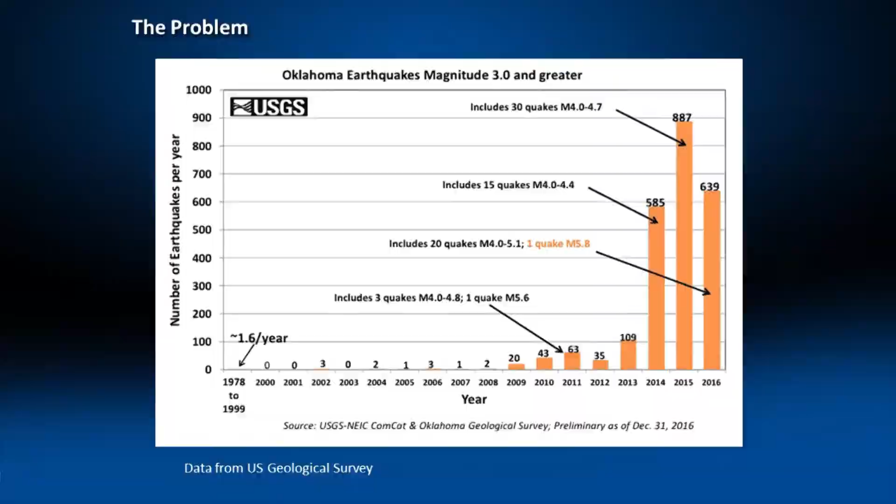You may or may not be aware, but some media outlets have actually called Oklahoma the new earthquake capital of the world, just because of the large number of earthquakes we've seen in recent times. In this graph, the three bars on the right represent 2014, 2015, and 2016. Everything else to the left dates back to 1978, and there were years we only had one or two 3.0 or greater events in the state of Oklahoma per year.

We had as many as almost 900 in 2015 alone, and I think 40 plus that were greater than a 4.0 magnitude. Over the last 6 years, we've had two that actually surpassed a 5.0 magnitude, being a 5.6 and a 5.8 that we'll talk about shortly.

Here you can see it represented geographically. You can see most of the activity is centered in north central Oklahoma. The red dots represent everything 2014 through 2016, and everything else with a different color is everything prior to that.

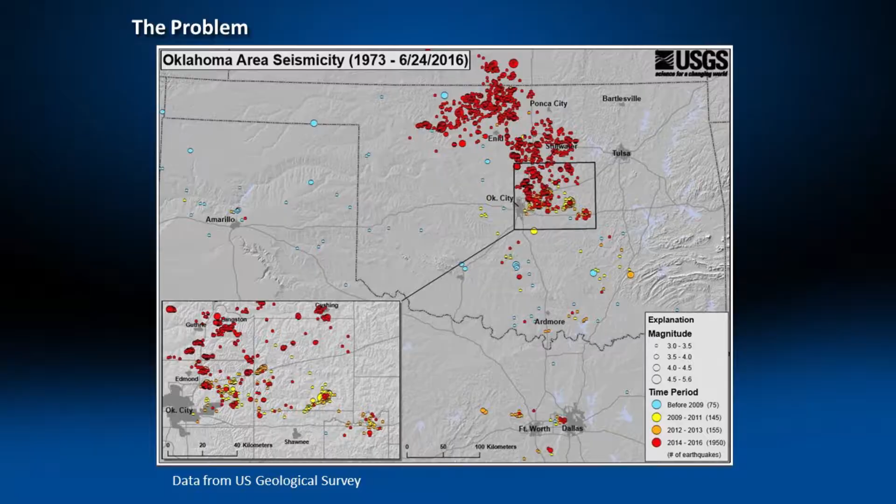Of course, there's been a lot of discussion about the uptick in activity. That was not the focus of our activities. However, I think the science has become fairly clear on that - it has a little something to do with maybe injecting wastewater into the ground. I'm not going to speak specifically about that from fracking.

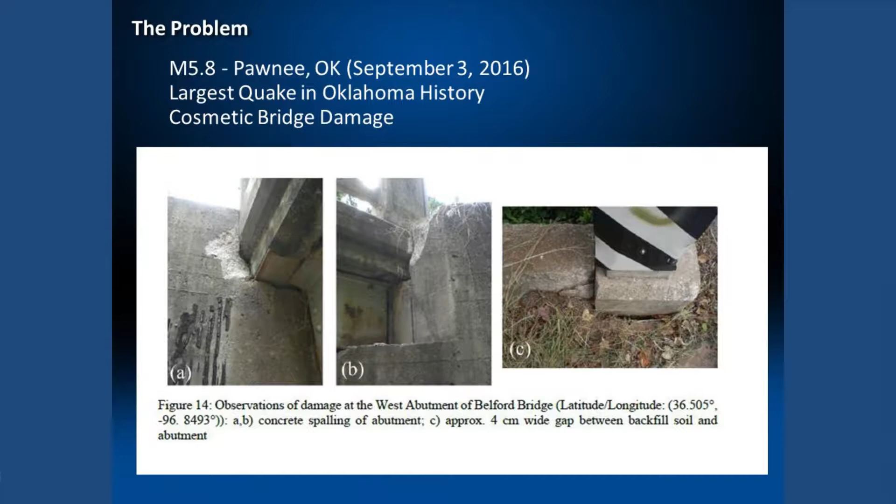So the 5.8 event we had, the largest in Oklahoma's history, occurred in 2016. The good news is that despite being the biggest event we've had, we only saw really superficial, cosmetic type damage, and some fresh spalling due to perhaps slapping of the superstructure with the abutment, a little bit of movement of some wing walls. But aside from that, we really didn't find any significant damage.

A team came up from the University of Texas and did some research of their own. They looked at not only bridges, but also went around and looked at areas that may have been impacted by liquefaction, as well as building structures. They did find some damage, nicely detailed in their report. Very little bridge damage, and they did find one area that had a little bit of liquefaction in the form of a sand boil.

More recently, we've had a slowdown this year in earthquake activity. However, Walt pulled up this information last week - the week ending November 3rd, which was Friday, we actually had about 22 events greater than 2.5, with the largest one being a 4.1.

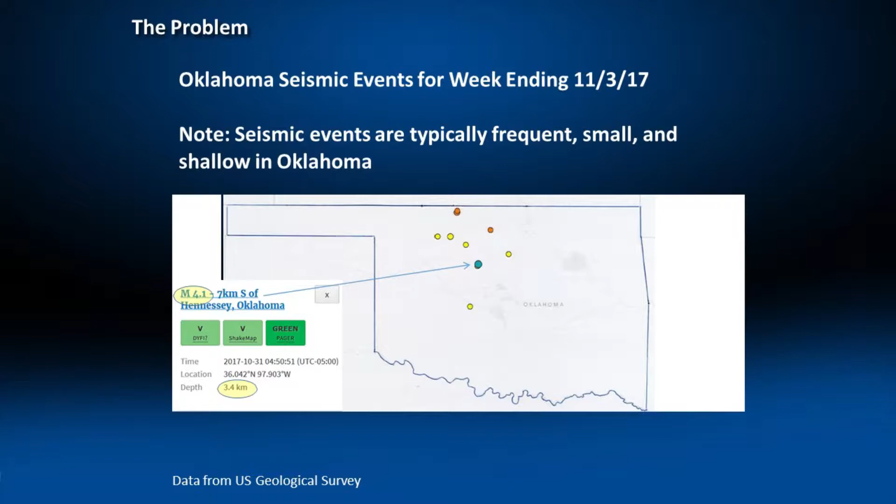You may not think a 4.1 is very significant until it hits very close to your house. We had a 4.4 hit within a mile of my home. I pulled it up on my app and was talking to my wife, I said, holy cow, this thing was literally underneath our house. She said, no honey, that pin is for the house, the other pin over here is for the earthquake location. But it was still within a mile of our home, and it really shook. 4.4, you'd think that's nothing, right? Well, it'll really shake your home. Some of you may have experienced that.

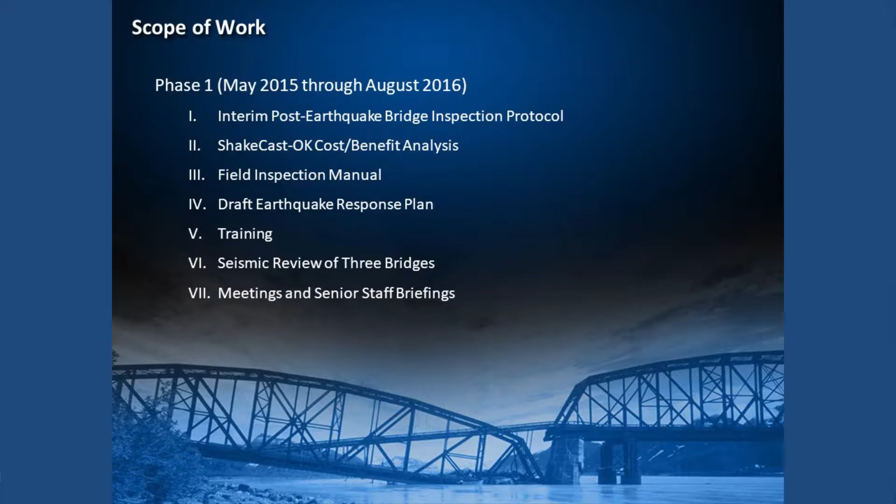So we pulled together for this program a lot of great resources. We borrowed from everybody and their brother, including Missouri DOT, Kentucky, New York, a lot of agencies. We got a lot of good information that we included in our response plan. Here's the tasks we were given by ODOT. Phase one had 7 tasks, which I'm going to cover here by the numbers with Walt. Phase 2, we're only going to talk about the first task, the development of ShakeCast, because at the end of the day that's kind of the goal of the program.

Our earthquakes are typically shallow, typically 5 kilometers. They're very frequent and we get a lot of activity. We want to ensure the safety of the bridges. So as a DOT, every time we get magnitude 3, we're out there inspecting the bridges. Obviously after a while this starts to fatigue our employees, and they've got lots of potholes to fix and lots of things going on. We don't need to get out in the middle of the night inspecting bridges when we're not finding damage. So we had to do something to back off on this protocol we had.

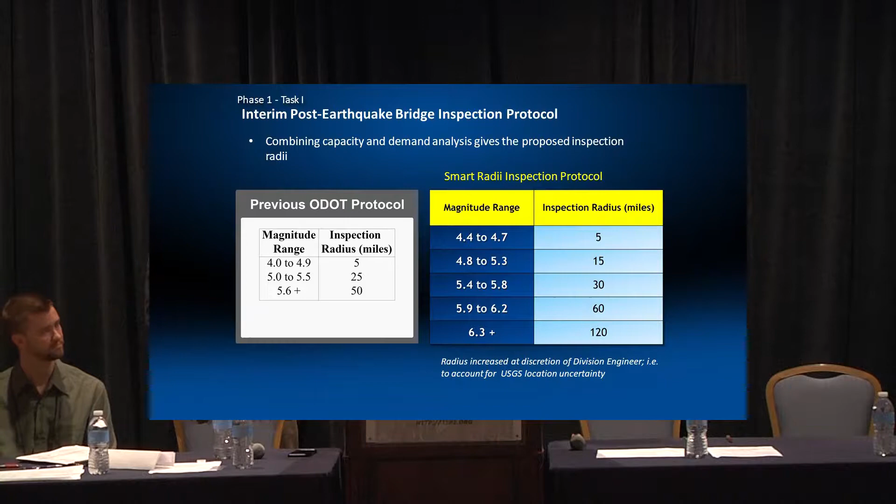Our Assistant Director of Operations wrote a memo in January of '15, and he said instead of inspecting at magnitude 3, we're going to go up to 4. So 4 to 4.9 is 5 miles, 25 miles for 5 to 5.5, and 5.6 and above is 50 miles. That's how we started out.

So our team, infrastructure here, Gregg and his people, they needed to come up with a protocol that was a little more scientifically based, something we could hang our hats on and be comfortable with to ensure the safety of the bridges.

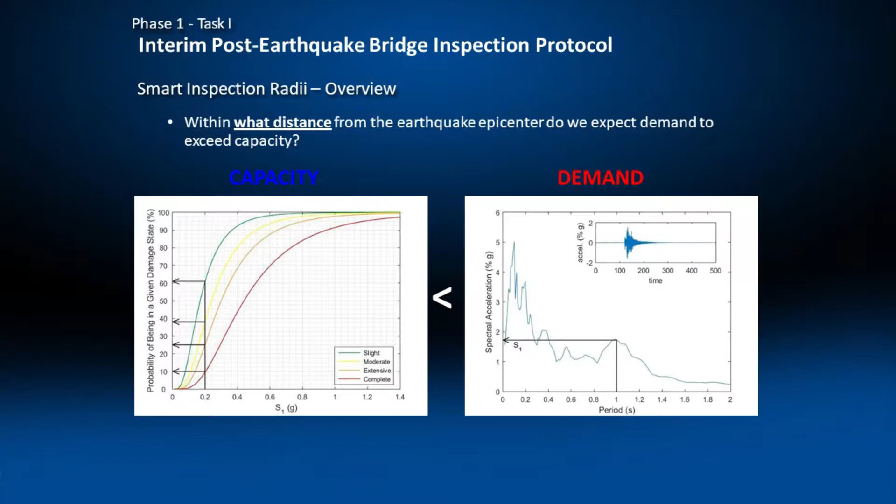So we start looking at fragility curves of bridges and looking at the acceleration. We've got capacity and we've got demand. As these waves move out from an epicenter of an earthquake, at what point do we start seeing damage? With that 1 second period on this acceleration curve on the right, that's the demand, that's where we're looking. We want to start inspecting at slight damage, that's the green one on the bottom left. Then there's moderate damage, maybe a plastic hinge starting to form. Major damage, complete plastic hinge. And then complete failure, your concrete column's not holding the concrete anymore, the aggregate is going all over the place.

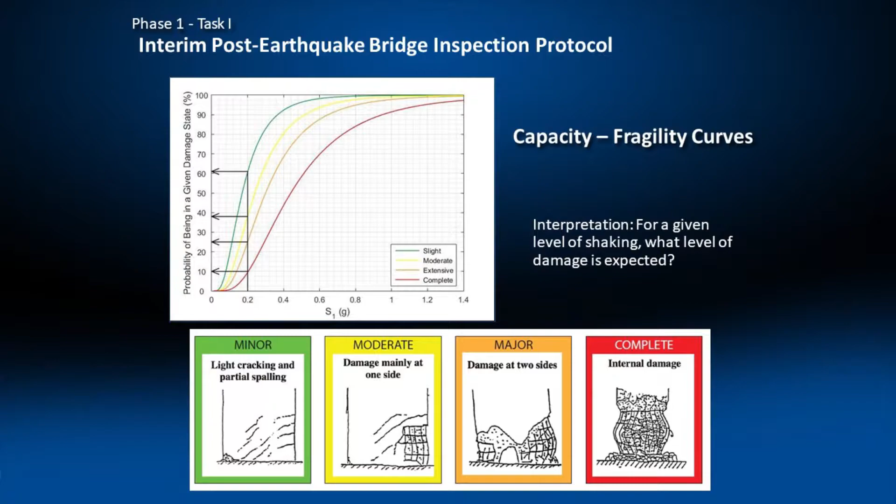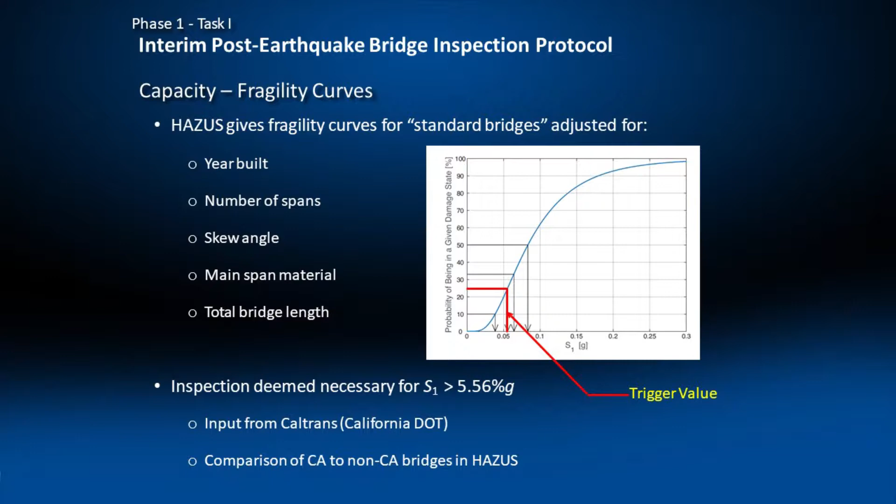We got the professors at OU, the real brains of this operation, and they came up with what we call a trigger value, that acceleration where we needed to inspect, that spectral acceleration around 5.6%. We had these fragility curves that took into account the year built - older bridges, older materials, less strength - number of spans, skew angle, main span material, total bridge length. We had all this built into our computer, and we had our trigger value.

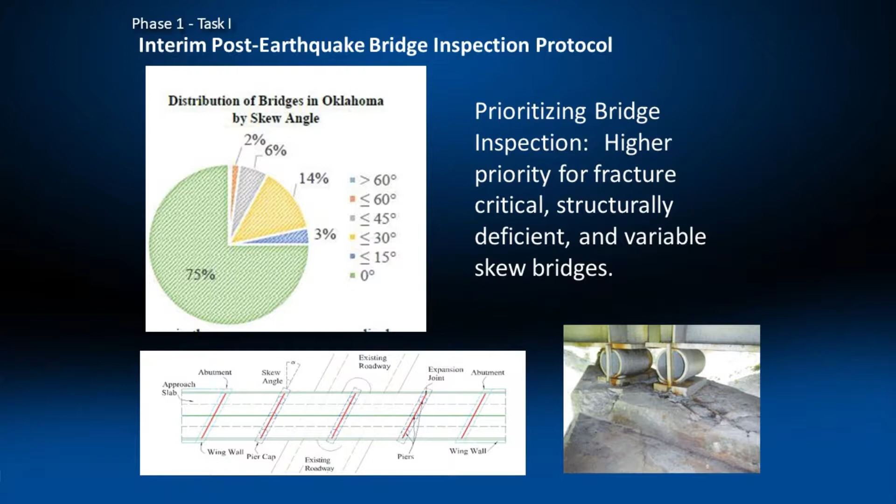On top of that, Oklahoma had other concerns. Maybe the fracture critical bridges, the variable skew bridges, do even worse. So maybe we just want to put these in a little higher category, start inspecting them sooner. Eventually we built this into our program.

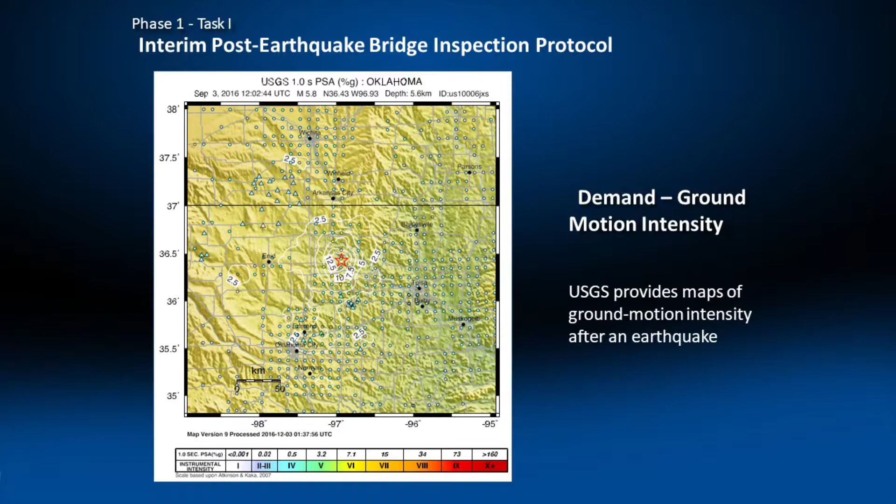So here we see a ShakeMap. The map shows the epicenter in the middle of the picture, a little red dot. And it shows, it's very hard to see, accelerations. The accelerations are typically higher near the epicenter, and as you go out they get smaller. It's not necessarily going to be a nice circle radius, it's going to be more pointed. So with that in mind, we need computer models that describe, from your epicenter, how far out do these waves go.

As they get further from the epicenter, they get weaker. In Oklahoma, we don't have a lot of seismic stations. We didn't really experience this until 2009, so we borrowed from some other source and adopted this Campbell 2003 model, which tended to overestimate our acceleration, so we put in a bias factor to get where we need to be with 1 standard deviation.

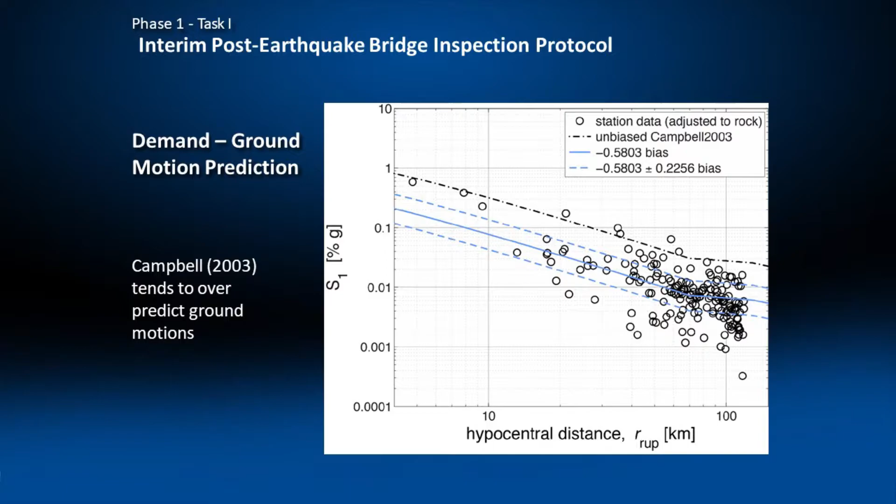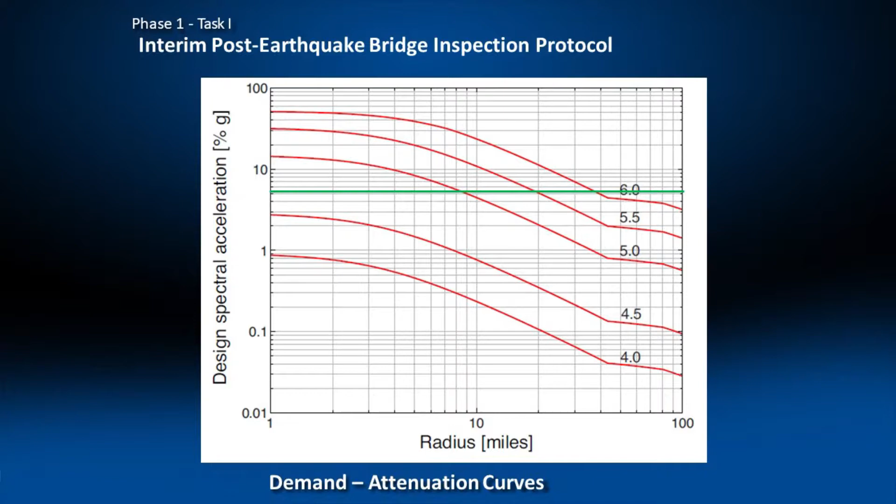In this, you see a little green line, and that corresponds to that 5.6 spectral acceleration. Then you see magnitudes from 4 to 6, and it just so happens that when you interpolate between those lines, at about a magnitude 4.7, we need to start inspecting out to 5 miles.

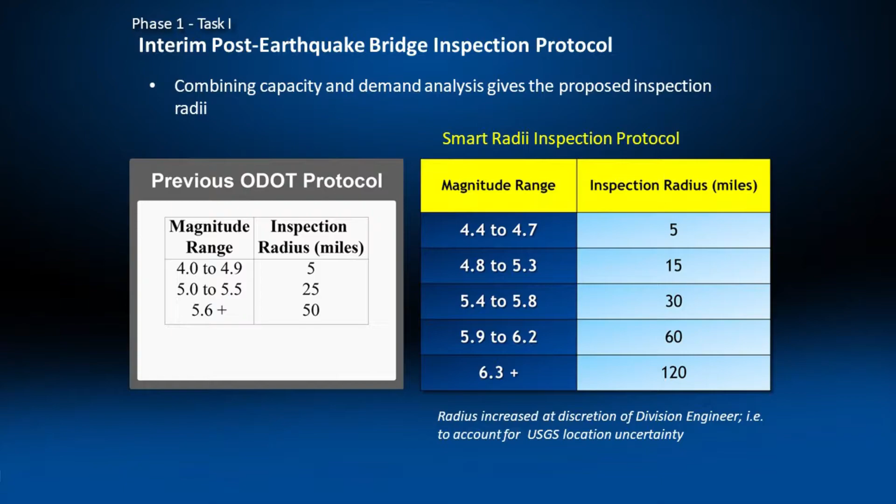Well, that's what the OU professor said. Our senior management had a slightly different idea. They said, you don't have that many seismic stations, maybe you just need to be a little more conservative, since we couldn't precisely say where that epicenter was. So on the low end, we went down to 4.4 to 4.7 at 5 miles, and 4.8 to 5.3 at 15 miles, etc. That's what our local governments are going to use to this day.

But we're going to move towards ShakeCast, as you'll see Gregg start explaining things.

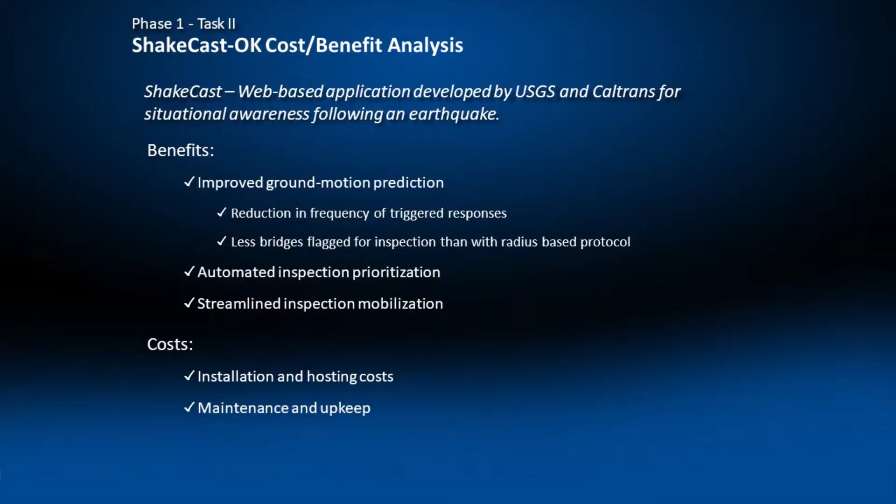So during phase 1, we also analyzed ShakeCast. We wanted to make sure it was actually worth pursuing, and it turns out I was probably the biggest naysayer. I really didn't feel like it was going to be worthwhile, but they convinced me over time, and I probably became the biggest proponent of it.

One of the biggest tasks we took on early was producing a very user-friendly post-earthquake bridge inspection manual. We wanted to get this into the hands of field personnel even before we had a full response plan developed, recognizing these guys are already out there - their earthquakes are happening as we speak. We need to give them a tool.

So we put together this manual, which is available - you can download it. It's a very well put together document, heavy in pictures and graphics, very light on text. Pictures, as you know, are very useful.

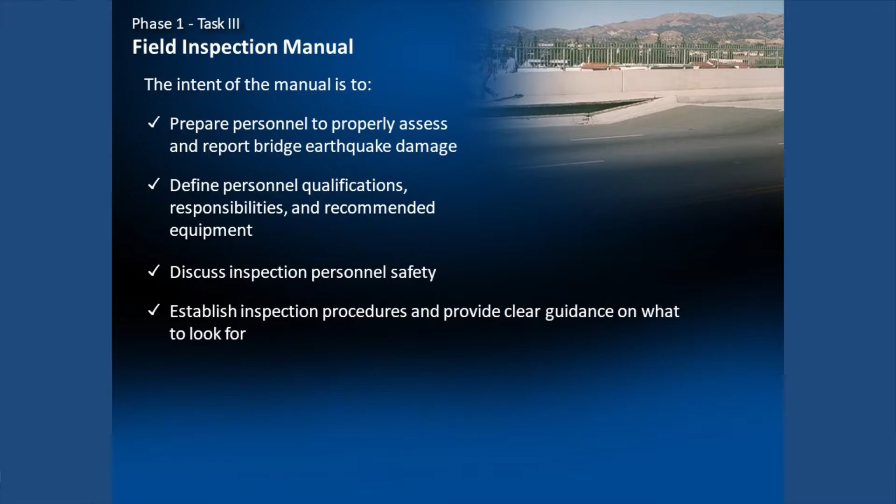One of the things we really focused on was making this manual user-friendly not only for experienced inspectors, but we wanted to be able to hand it literally over to a firefighter if we had to and say, study this - you may get called on to go do post-earthquake bridge inspections. So we wrote it to both audiences, if you will.

So the manual, again, is very picture heavy - I'm going to show you some of those here in a minute. But we really wanted to show folks what we're looking for during a post-earthquake bridge inspection versus what we traditionally look for during a routine safety inspection. Sometimes it's really hard to tell the difference in the types of damage we find.

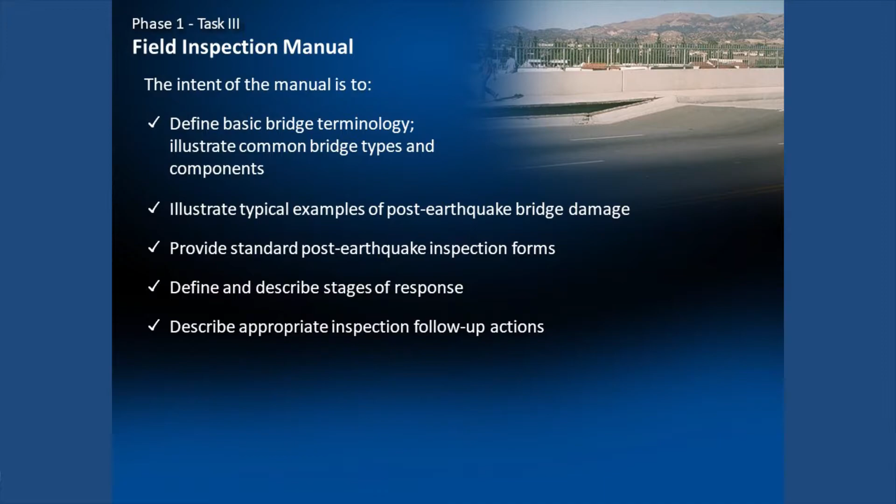So one of the tools we wanted to give them was a one-page stage 1 inspection form. We have stage 1 and stage 2 inspections, stage 1 being the initial response, ground level assessment - very quick, or efficient might be a better word, to go out there and just look for obvious signs of damage.

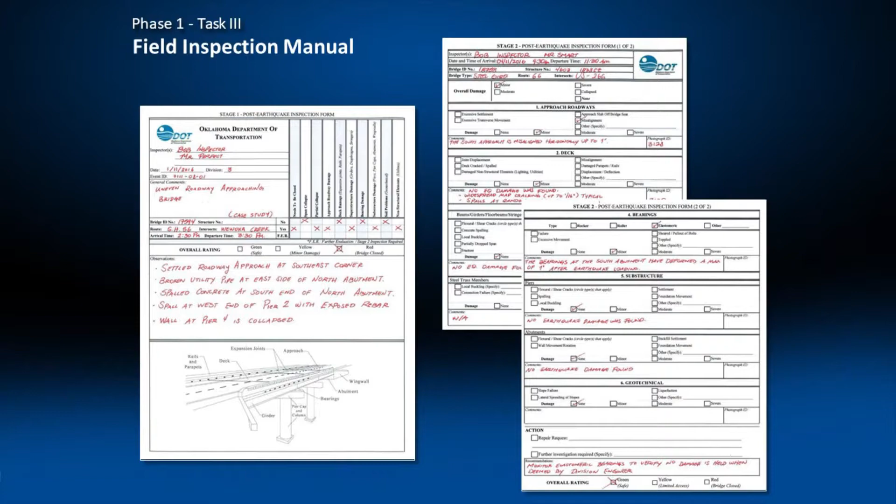Stage 2 gets called for - that's a more experienced inspection team, certified bridge inspectors. They're called on if the stage 1 team feels it's necessary or appropriate. They go out with a 2-page inspection form to complete. But both of these are very quick, very efficient. We wanted to give them tools that didn't require a lot of time on paperwork so they could actually focus their efforts on the bridge.

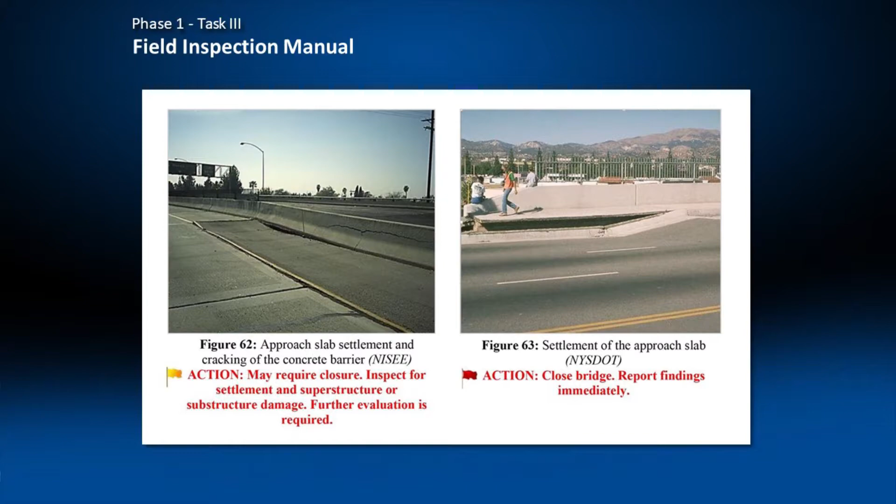So here are some examples of the types of damage shown in the manual. The good news is, Oklahoma has had very little significant damage from earthquakes - that's great from a bridge management perspective, but from a manual writing perspective, that really stinks. We had to pull information from every other manual on the planet to come up with photographs. You see examples here of the approaches. We not only included the picture, but also discussed what action we would take if we found that particular damage, including things like closing lanes or calling in a stage 2 inspection.

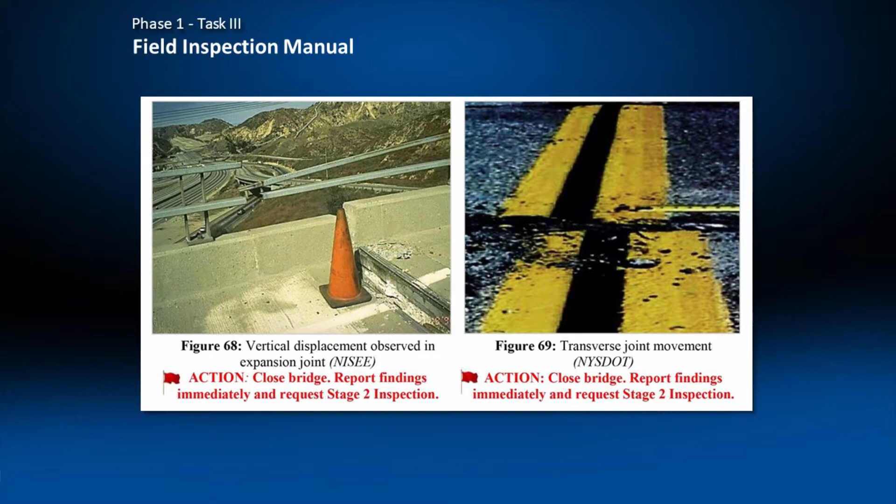Here's some bridge deck movement, examples of other utilities and lights that might be damaged on the structure. Beam ends and bearings, it turns out, are very susceptible to damage.

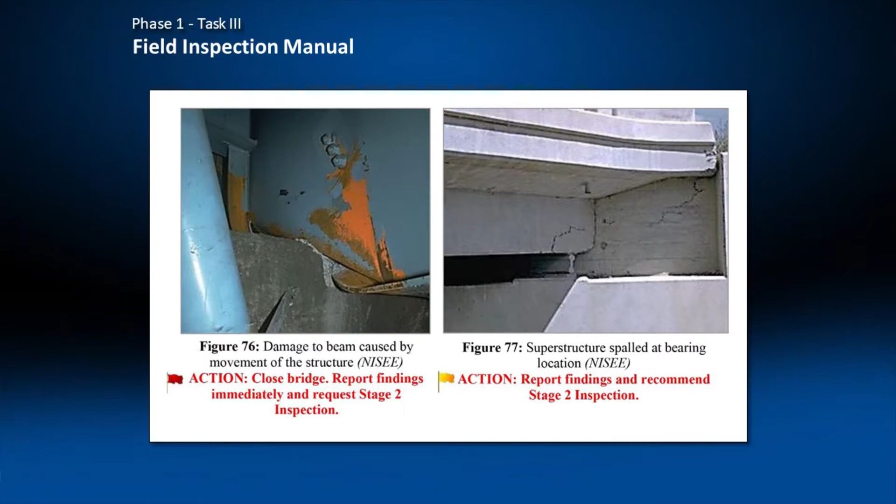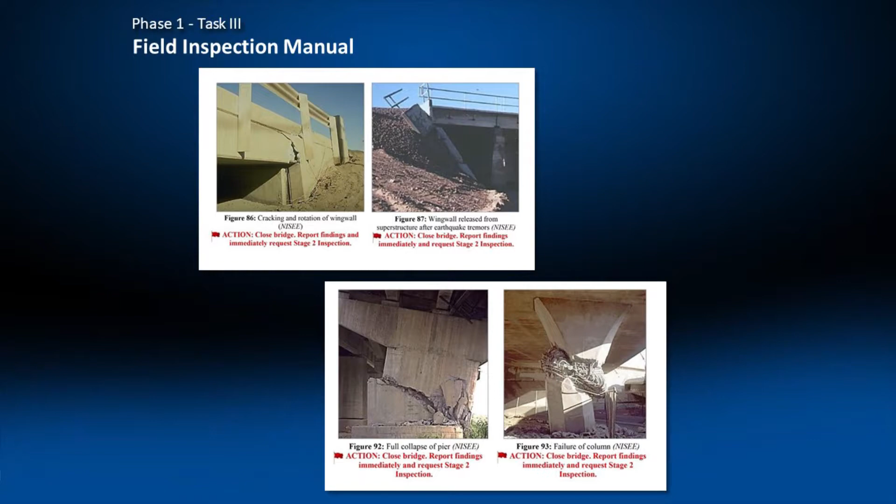Here's some more significant damage. Fortunately we haven't seen anything like this, but we wanted our inspectors to know if they did see this, they've got a problem. In fact, this photograph on the bottom - we tell the guys during training, if you see this condition and you don't close the bridge, you might want to think about a different profession, okay? Because maybe you ought to relook at that. Same thing on some of these.

There's also geotechnical conditions highlighted in the book, things like soil liquefaction, sand boils, things that could be indicative of a problem but not necessarily warrant closure.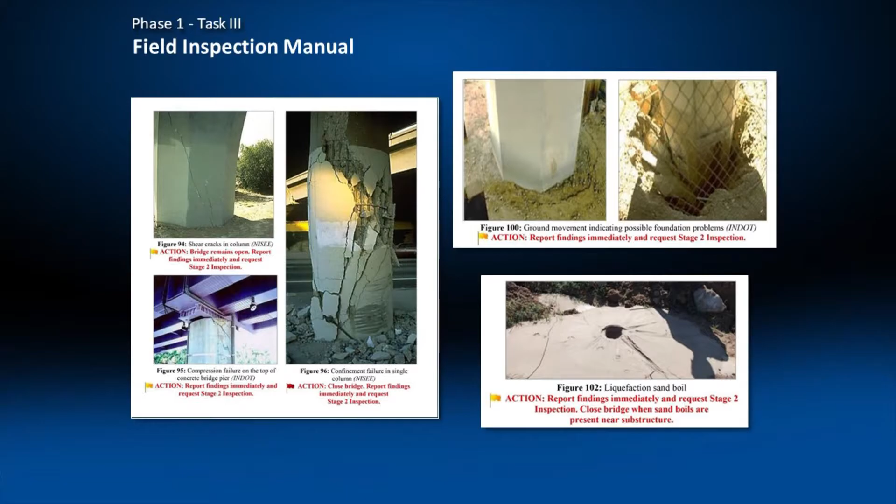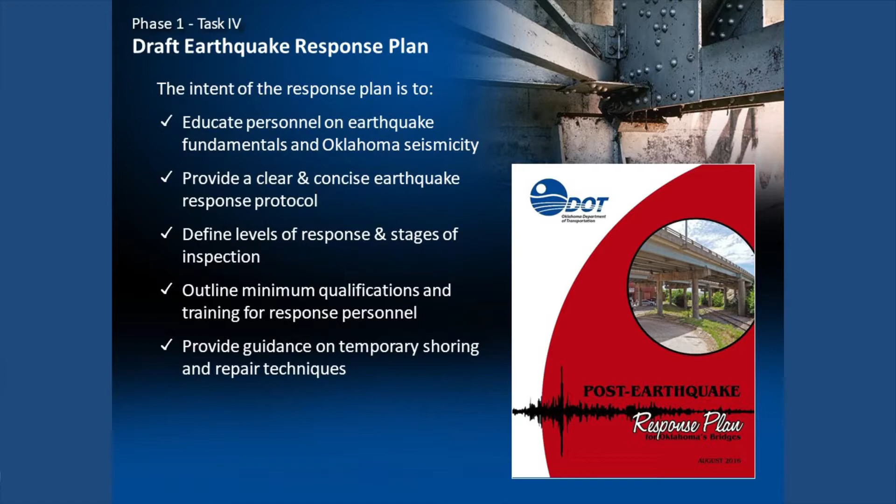Okay, so after that, we focused our efforts on the response plan. This is a management level tool, also available if you're interested in seeing it. It's downloadable. We've got some very good guidance to the management team on how they're going to manage the response - different stages of inspection, the qualifications of personnel, training that's required, earthquake fundamentals, how to properly shore a bridge if you want to restore service to it, etc.

Okay, so with that, we wanted to provide training, Stage 1 training and Stage 2 training for our inspectors. Stage 1 training, we actually provided about 12 different modules or lessons around the state, 3.5-hour sessions at all the different field divisions. We always encourage the guys to be really safe out there, and I kind of joke about that, but it actually is a good idea to not both go under the bridge necessarily at the same time if things are a little bit unstable.

So a lot of good stuff here in the training. Don't have time to go through all of it, but I will say that the training was very successful, not only from an earthquake response perspective, but also that it would help the inspectors, the maintenance personnel, to understand bridge fundamentals a little better. So here's some of the training.

We trained up 400 personnel throughout the state, including ODOT personnel, local government partners, U.S. Army Corps of Engineers, Oklahoma Turnpike Authority, and these are the different divisions in the state of Oklahoma, the ODOT divisions that we provided training in.

Stage 2 training was provided during ODOT's annual QA. We trained up about 200 certified bridge inspectors on what to look for for post-earthquake inspections. That was also very successful. Gregg trained over 400 people - I think he trained somebody in all 77 counties. That was just a tremendous task, and we really appreciate his help in this effort.

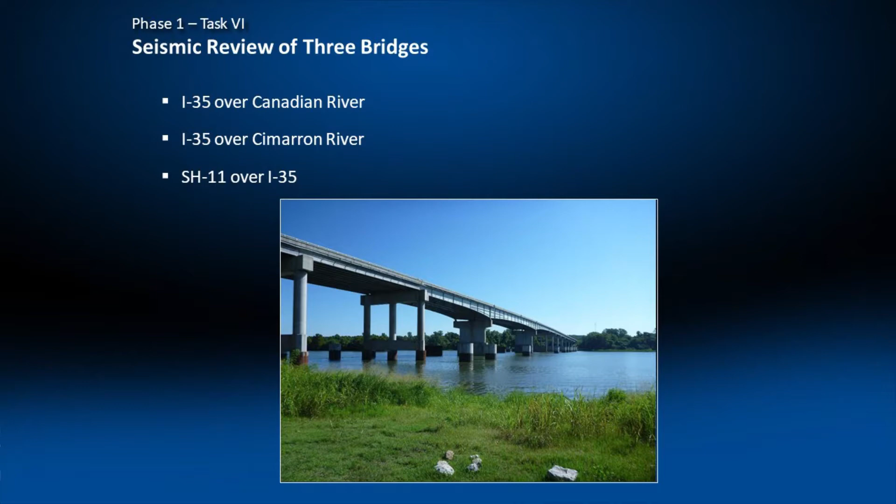So we wanted to look at 3 different bridges a little bit closer, 3 bridges along I-35. We wanted to check our fragility curves, our trigger level, 5.6%, were these realistic? So we took a bridge on the South Canadian Bridge, more recent construction, drilled shafts, series of 100-foot spans, did a little bit of geotech, got the professors at OU to do some finite element studies, really dig into this thing. Another older bridge on I-35 at the Cimarron River, skewed, older design, widened, kind of a challenge.

We're going to get lateral spreading. We had concerns. And then we did a grade separation. Well, you think, why a grade separation? Well, how about that column? It's short, it's stiff. How's it going to behave in an earthquake when we're not really designing for earthquake? So this is a concern to us.

We did our investigation, and there was pretty good news. They validated our trigger value. They found the potential for liquefaction, maybe some of the lateral spreading issues, wasn't really all that high.

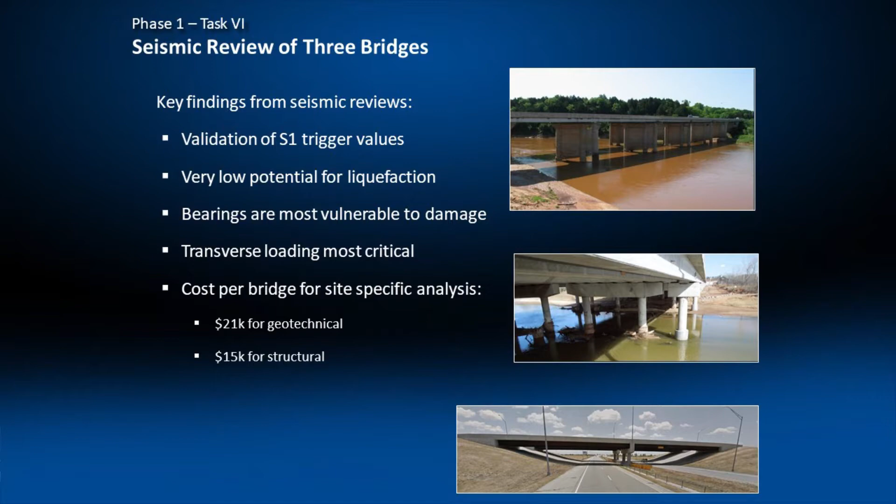We found, to me, somewhat surprising, that the bearings may have been kind of a weak point in our design. Professor Harvey describes the concerns there - he said transverse loading was more critical. And this did cost us a little bit of expense, but when you think about it, we're going to show you that we're saving a lot of money because we're having to do a lot less inspections while still ensuring the safety of our bridges.

We had the Oklahoma Geological Survey involved, and our partners with the FHWA, Randy, he's always a great resource.

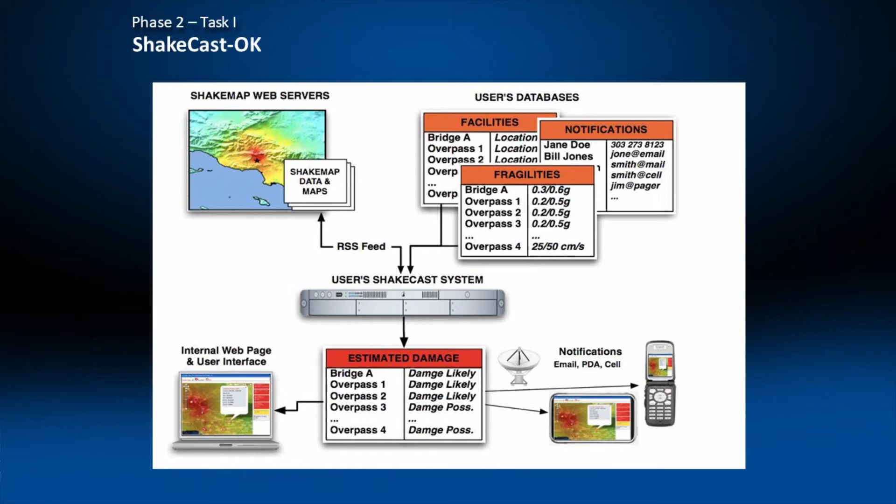We recently adopted ShakeCast. This allows us to take those shake maps, it allows us to take our fragility curves, we know the lat and long on our bridges, and we got that in the NBI data. So we could take all these factors together and start developing lists of bridges that might be impacted.

By a seismic event, the professors at OU have worked up a system where they can send out notices to our field people, to our central office, and we can get the information where we need to get it very quickly. They can develop lists, move it into an Excel spreadsheet, and they have routes to inspect, starting with the most critical bridge.

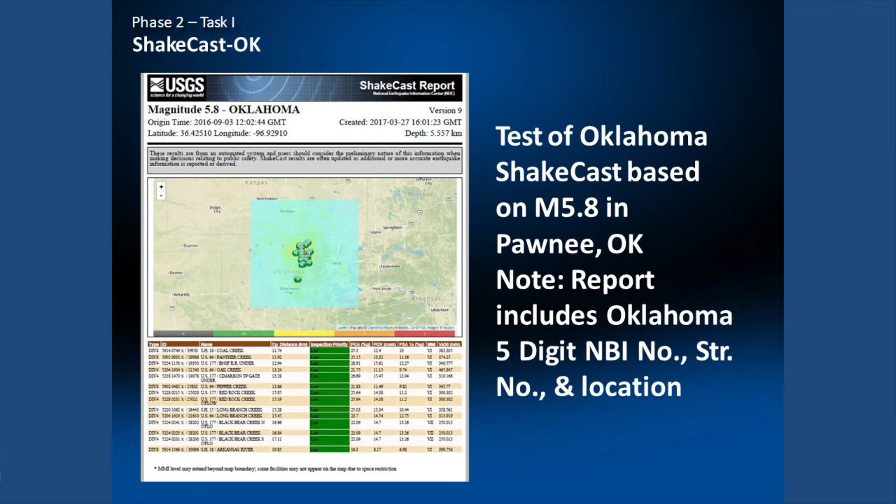We can do all this with ShakeCast, and we've tailored it to Oklahoma, the way we do NBI numbers, the way we do bridges, the crossing that we have, the facility carried, the field division. We've got it all tailored to the way we're used to doing things.

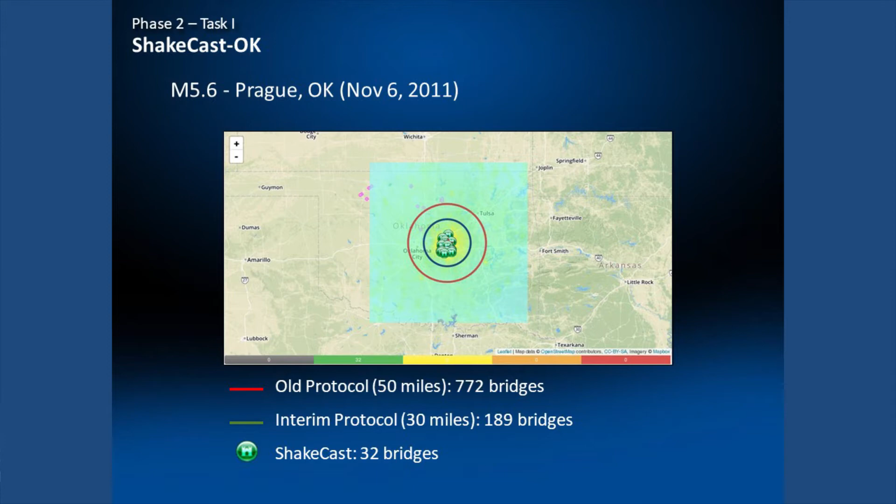Let's just go back in time. In 2011, we had a 5.6 seismic event in Prague, Oklahoma. There was damage locally to some buildings, but no damage was found on bridges. But we had to inspect 772 bridges.

Had we had ShakeCast back in 2011, we would have only had to inspect 32 bridges, and we would have accomplished the same thing.

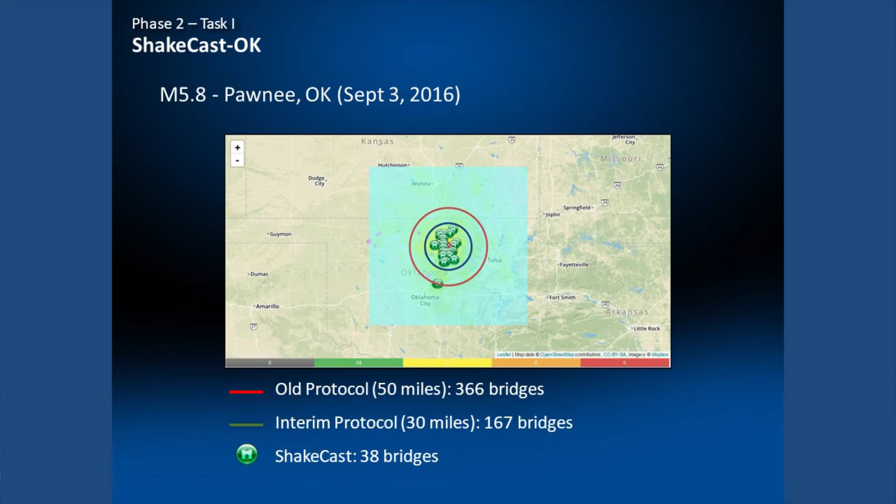Similarly, the even bigger seismic event that occurred just a little over a year ago in Pawnee, Oklahoma, we would have gone out 50 miles with the old protocol that Paul Green, our director of operations, wrote that memo I told you about earlier. We would have inspected 366 bridges. Now with ShakeCast, we're down to about 10% of that value, just 38 bridges.

During a really serious event, let's say hypothetically you got a 7 or something, and you started to see widespread damage, do the standards change for what you keep open if everything starts to close and you need to maintain access? Maybe someone like California has more on that, but I'm curious if that was something you guys looked at. A really nasty event, how do you deal with that?

Okay, assuming we have an essentially catastrophic event, because a 7.0 in Oklahoma would be catastrophic, we'd be inspecting every bridge in the state, for one. We'd probably be calling on every single resource that we have to do inspections. To be honest, our response plan would be useful, but it would be adapted on the fly in that event, because I'd argue we're not really anticipating a 7.0, something in the neighborhood of a 6.0 possibly, and that's still a significant event. We're planning for that level of event.

To answer your question, will we lower the standard on what we can keep open? I think we'd get creative. I think we might look at shifting lanes, keeping parts of bridges open. We'd have to really get creative to keep people moving, recognizing that it's not just about people getting around, but emergency personnel getting around, et cetera. As you guys know, when the event you don't anticipate happens, it doesn't matter how much planning you've done, kind of all bets are off, and you gotta adapt on the fly. I guess that's my answer.